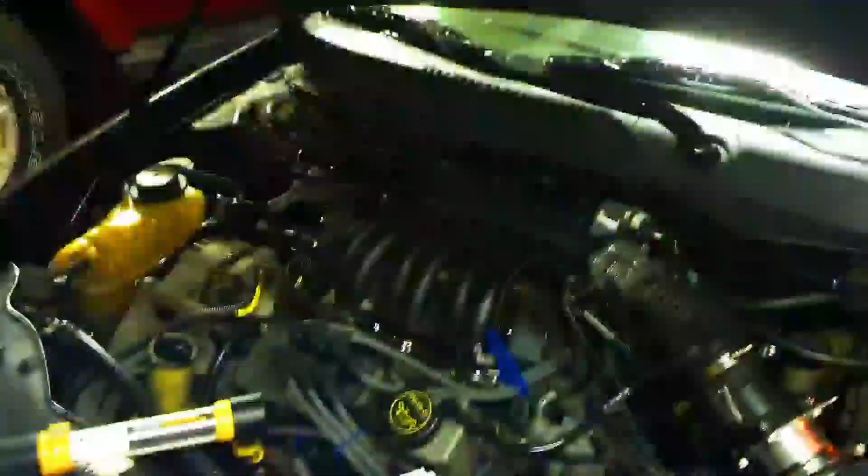Piston rings on a Ford Taurus 2003 overhead valve 3.0 liter. I'm going to start by taking off the light stuff like the upper air intake and all the throttle body and all that junk while it's cooling down because I just got home. And then after that, I'm going to drain the coolant, drain the oil, drop the oil pan, and then I guess just work my way down from there on top.

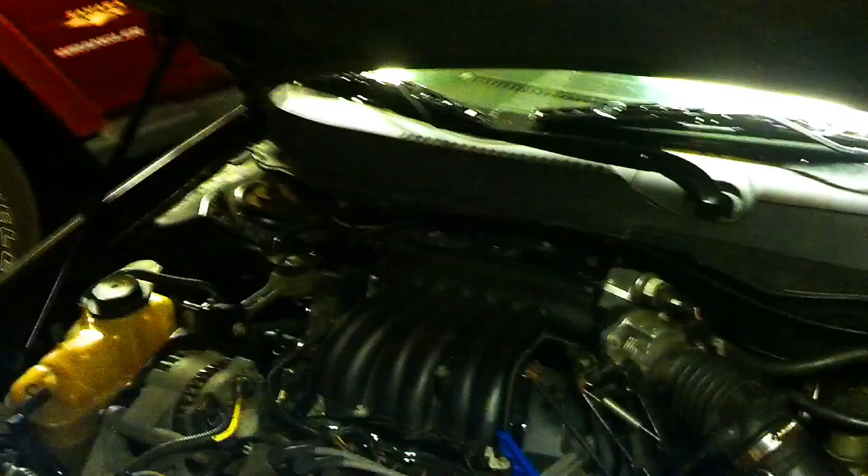Compression test gave me the results of cylinder 1 about minus 20% compression, and cylinder 3 gave me about, I believe, minus 30% compression. Cylinder pattern is 1, 2, 3, 4, 5, 6. So as you can see, I kind of prepped myself already. Got all my tools set.

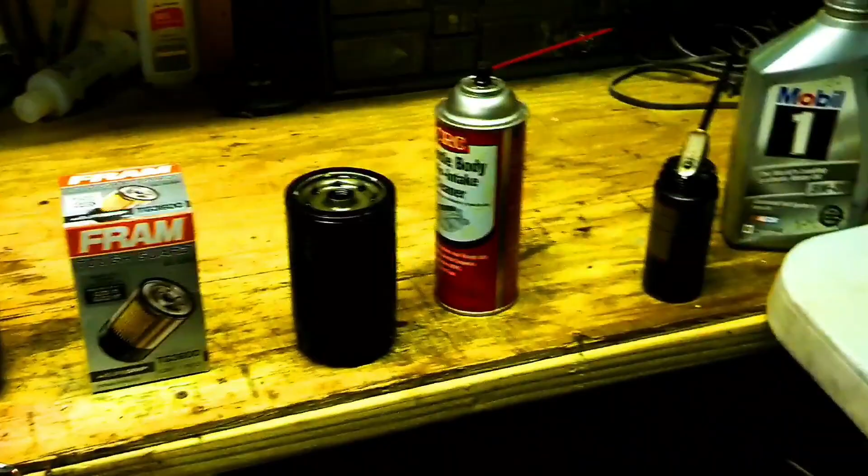I bought a honer, which you would call it, but I'm just going to be deglazing. Got my piston rings. I got valve lapping compound. Hopefully get myself to do that, if I have enough time, I pray I do. Got my oil. Throttle body cleaner. I'm going to try and record as much as I can because I only have 2 hands, you know, so I really do need this video as well. So let's get to work.

Alright, got the upper air intake off and all the throttle body stuff. I just took the motor mount, part of the motor mount off the alternator. Got that whole assembly out over there to the left of that, the intake. Now I'm working on the belt, and after that I'm going to take the fuel rails off. This whole pack of wires. Squeaking.

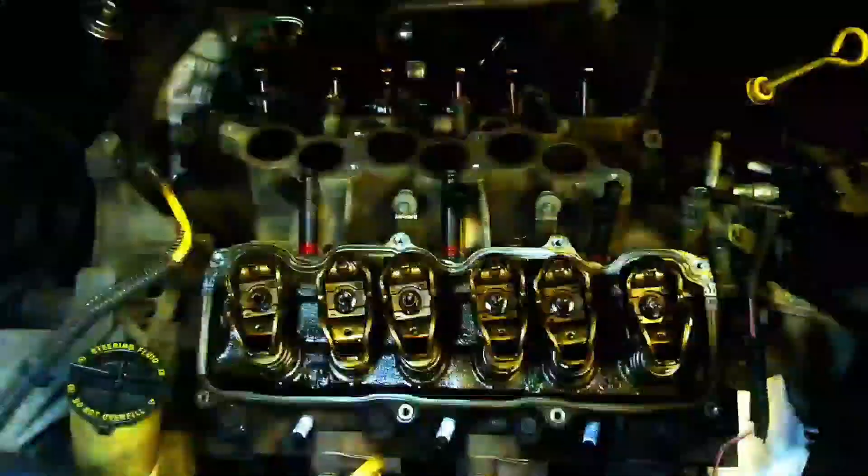Alright, we got to the rocker arms now. Just got done taking the valve covers off. Sorry, I kind of skipped around. I figured out, because it totally slipped my mind, that I forgot to pick up one of these Torx sets to get those off. And I got to get this tensioner off to get this whole mount off of the head. And I can't really do much until I get the Torx set.

So I stopped filming because I thought I wasn't going to do anything else. Tomorrow I'm going to pick up a Torx set, get this manifold off, get the heads off. Hopefully go smooth from there, and then just replace the rings and put it all back together.

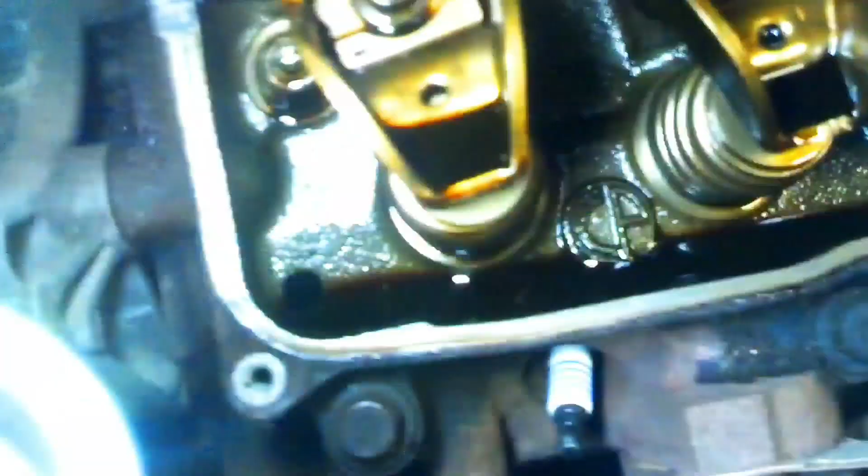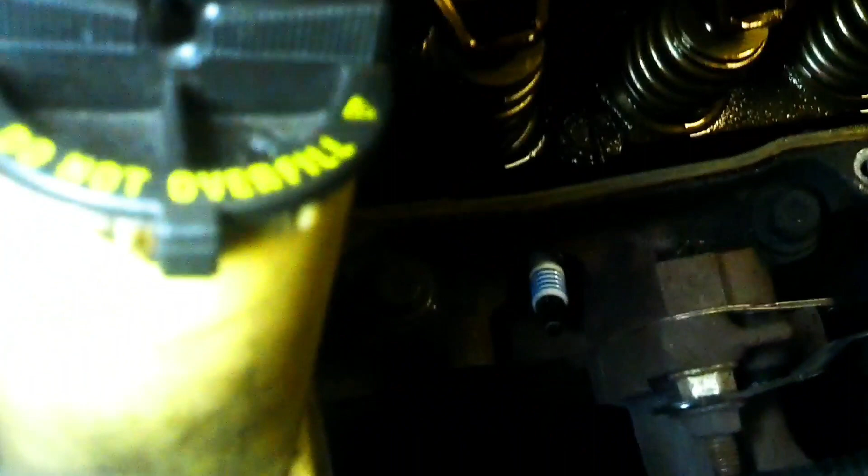I was checking the oil real good, just looks dirty. I haven't changed it in a while. Looks normal though, no debris or anything. Very clean, other than the brownness of it. Rocker arms look good. Valve springs look good. Continue on tomorrow.

Alright, had a major setback. I couldn't get the tensioner bolt off the tensioner pulley. As of right now, I drained the coolant, I drained the oil, I got the coolant reservoir out, and I'm working on the steering pump right now. I'm trying to get that off the head. And after that, I still got to drop the oil pan, and then I'm going to start taking the lower intake.

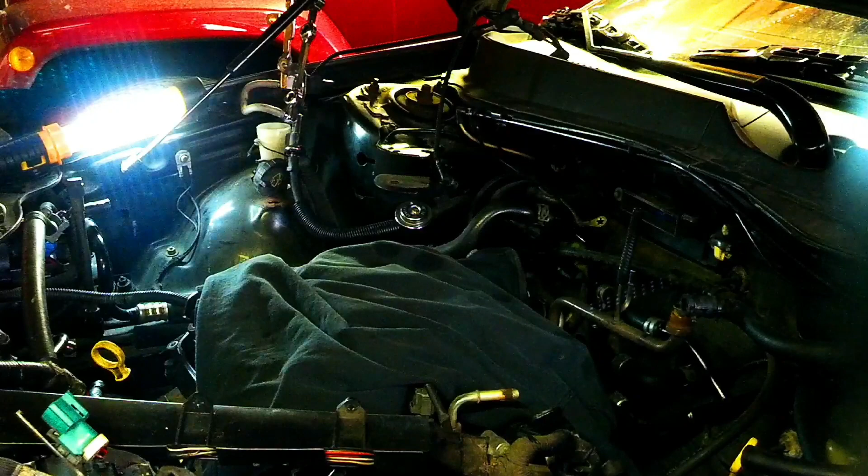Alright, from here, I'm going to see if I can drop that oil pan. Alright, finally got the whole oil pan off. Took the oil pump off, cleaned that. When I got the oil pan off though, I found these little guys in my oil pan. I haven't really found anything else other than those two little things.

I'm about to start pulling the lower intake manifold. It's basically just taking off bolts from here. I assume you guys know how to take off bolts. Make sure you keep track of all of them. Keep them in a pattern, whatever you gotta do. Line them up, label them, like so. Makes it a whole lot easier. Alright.

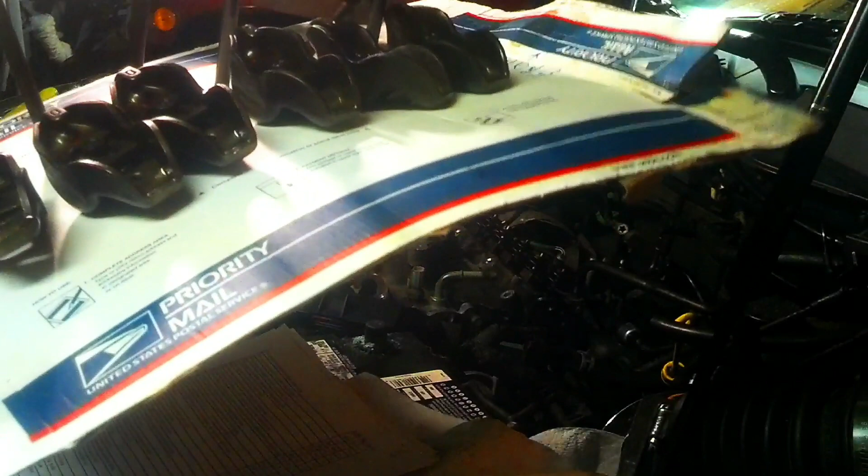Just had a push rod fall in there a little bit. If that ever happens, just use a magnet. Intake manifold. Bam.

I went onto the heads now. I took off all the gaskets. So let's get to it.

There she goes. That's what she looks like. Good 30 pounds right here. Intake valves, or valve stems, exhaust, and

there you go. I'll get the second head off in a little while. I want to work on this side first, because this side's more important. I want to see what I'm dealing with. So here we go. You see all this stuff flake off, really.

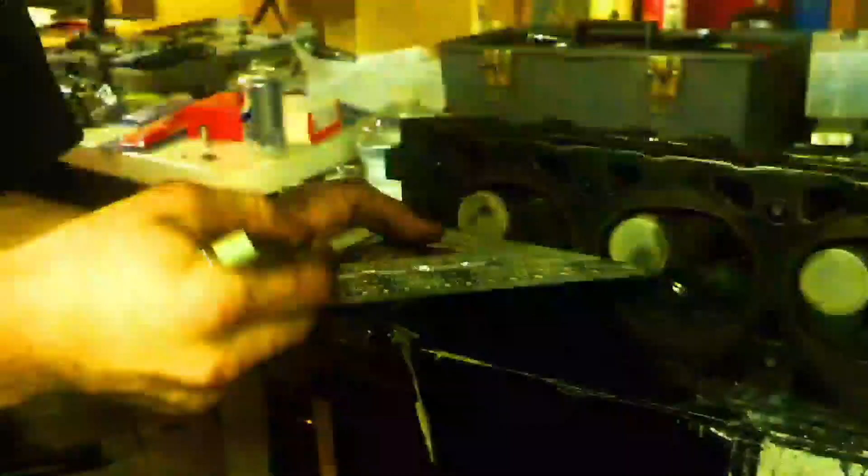Specs call for 0.08. I'm using 0.02 right now. And you're going to measure, first, you're going to start off basically 1, 2, 3, 1, 2, if I had a larger thing obviously, and then 1, 2, 3, 4. After all that checks out, basically just clean it up, put it back on.

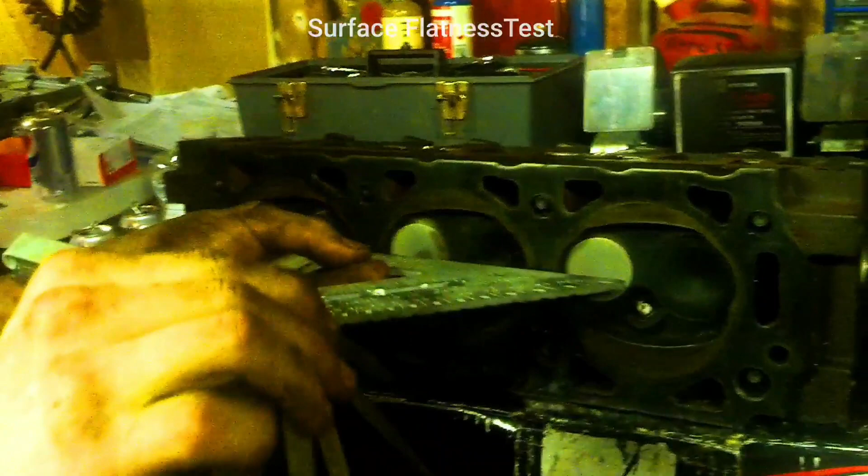Obviously I can't even fit the 0.02 in there, so so far it's pretty straight. And if it does go through, just go on to the next larger size, which is 0.03, and see if that goes all the way through. And if it does go over 0.08, you have to get the surface resurfaced. Just take it to a machine shop and have it milled. All checks out pretty good.

Alright, just got done cleaning up the head surface area. Tried to polish that up as best as I can. There's still a little bit of residue on there, but with the machine marks, they go left to right this way. So I tried to go with them as best as I could.

And I haven't done this one yet, so you can see the difference there. Nice and black still. And nice and shiny. I did one head surface already. This front one I did. Like I said, there's still a little residue left, but there's the one I haven't done yet. Sanding it takes a long time, not gonna lie.

After I get these two other surfaces done, I'm gonna devote the next hour after that to piston rings and cleaning the pistons. And I'll show you how to clock your pistons, I'll show you ring gaps and all that. So let's get to it.

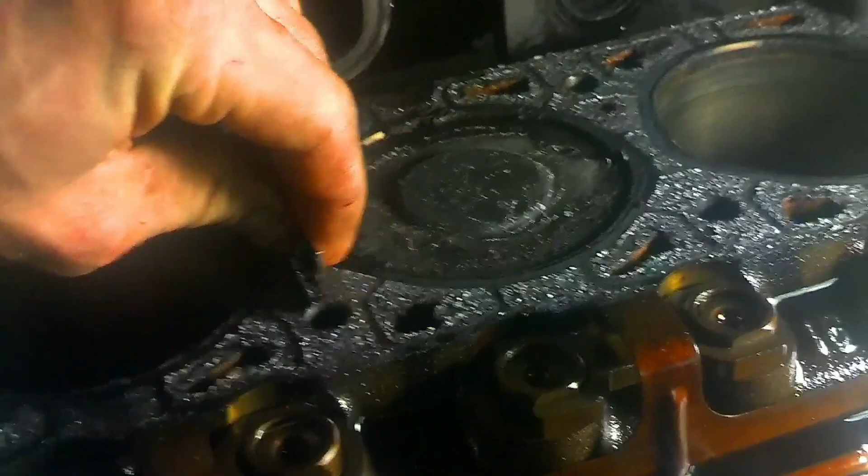I got piston number 1 out. But first, I want to clean this head gasket surface area. You're gonna take a razor blade and just very lightly scrape all this off slowly. If you do it at an angle, you're gonna hit the surface of it, scratch it, and it's not gonna be pretty, it's not gonna be good. So you just want to do this nice and gently, slowly.

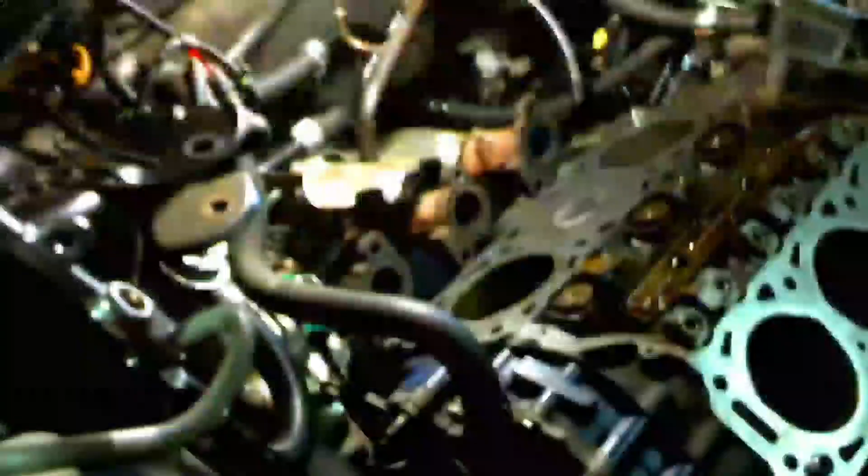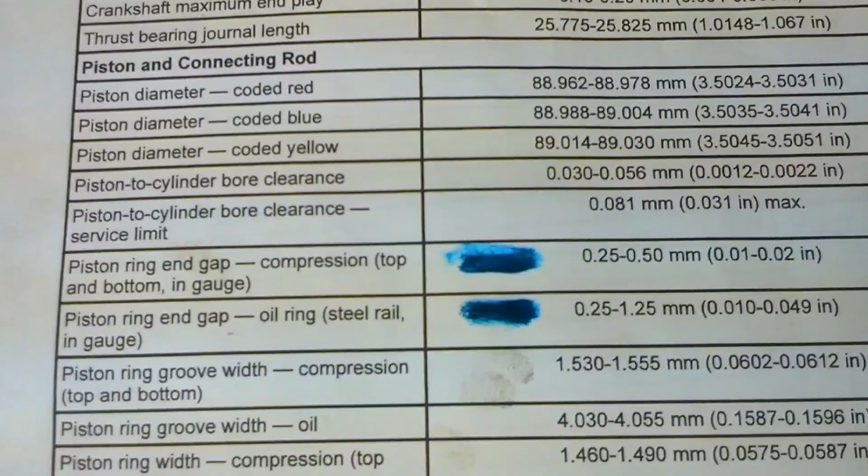We're gonna check piston ring end gap now. I took the top old one off, I just spiraled it off. They say you're not supposed to, but I heard bad things about the tool, so I'd rather just spiral them off. Specifications call for the top ring end gap 0.25 to 0.50 millimeters. Piston ring end gap for the oil ring, 0.25 to 1.25 millimeters.

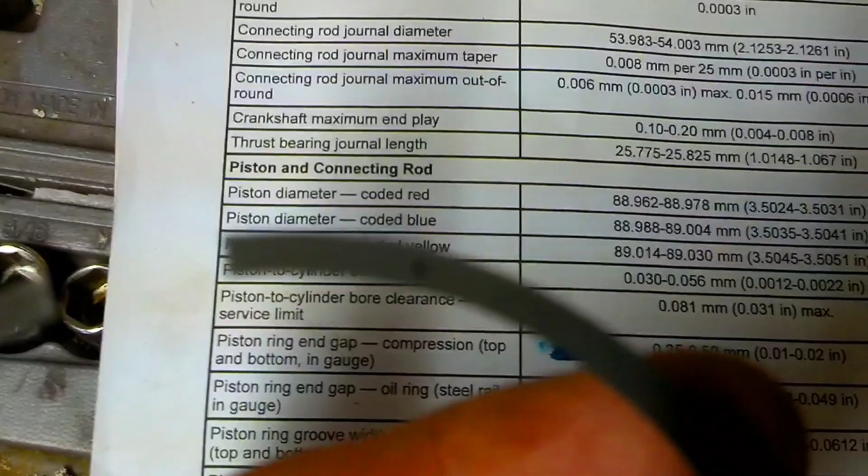Top ring is black. You have an indicator dot, and you can see that a little bit, right in the middle of the screen. That dot always faces up. The rest of the rings don't have it. They do not have a lip or anything. The top ring does. The lip faces down. And then you got your oil rings, which we'll check in a minute.

I got the old ring off right now. This is one of the bad cylinders, so I'm going to see how bad this ring gap actually is. So you're going to put it in here, pre-lube it first. I put some oil on the cylinder walls. Alright, it's in, but obviously it's not level and it's all messed up.

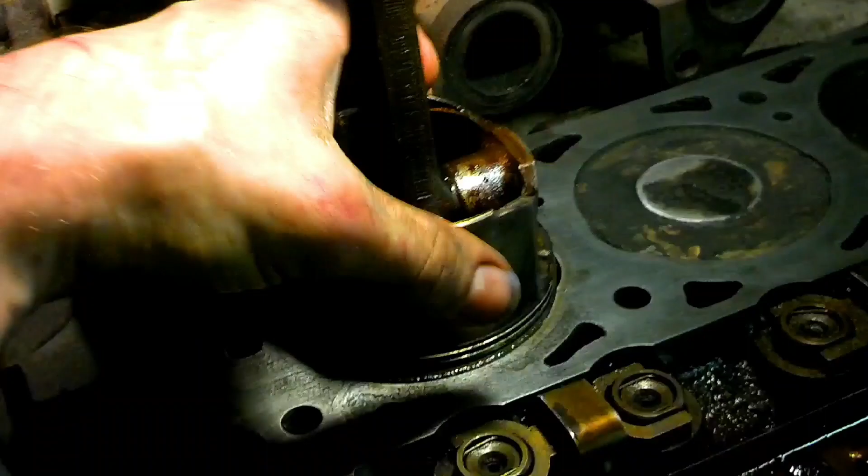So you're going to take your piston, put it in upside down. There we go. And then just let it sink down until the old rings meet up with the head. Now you're squared up. Now you just take your feeler gauge and check the gap. See, your end gap is right there. Try and do this with one hand here.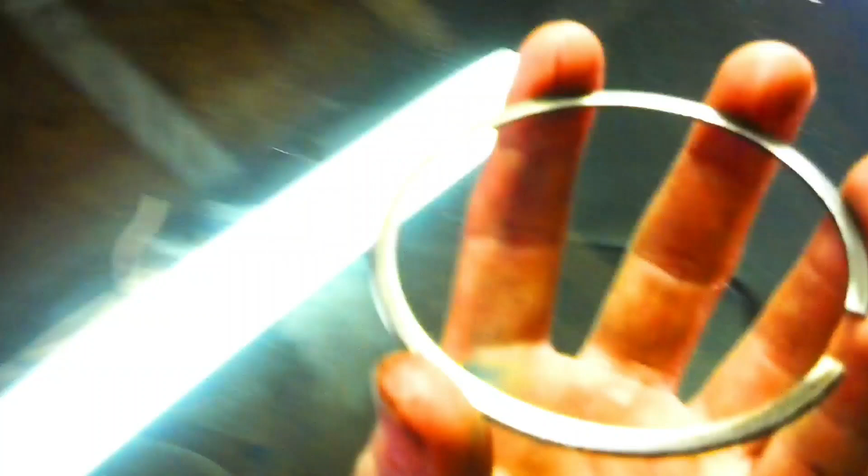I am pretty sure I just found my problem. Cylinder number 1 had low compression, so that's one of my problem cylinders. Here is piston ring number 2. Shredded on the, this is the lower side of the ring. This is the second piston ring. 0.50 fits, 0.75 does not, so I assume it's about the same size, from 0.55 to 0.60, somewhere around there.

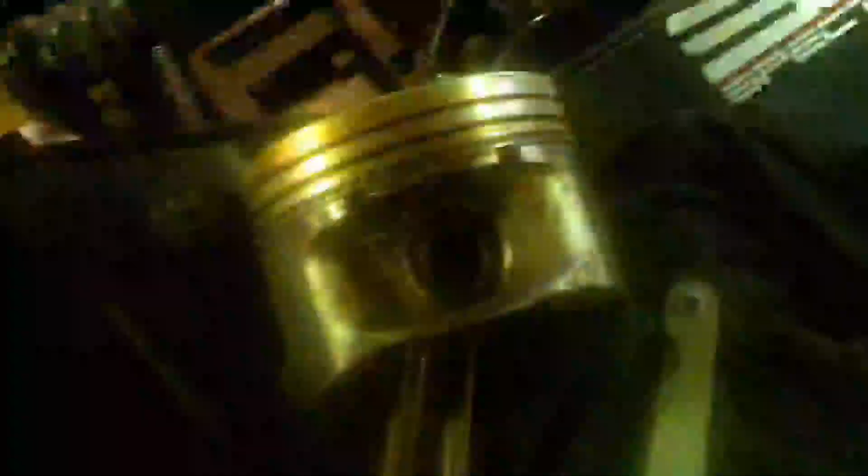Next step, before you put your new rings on, just take one of the old rings, just run it through the grooves all the way around to get all the debris out. I'd take one of the ends if you can and just run it all the way around. About to put the rings on.

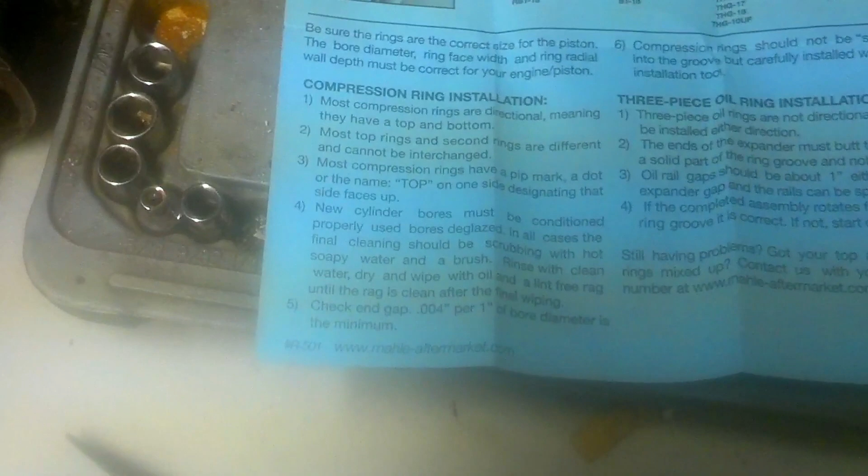Most compression rings are directional, meaning they have a top and bottom. Most top rings and second rings are different and cannot be interchanged. Most compression rings have a pip mark, a dot, or the name top on one side, designating that side faces up.

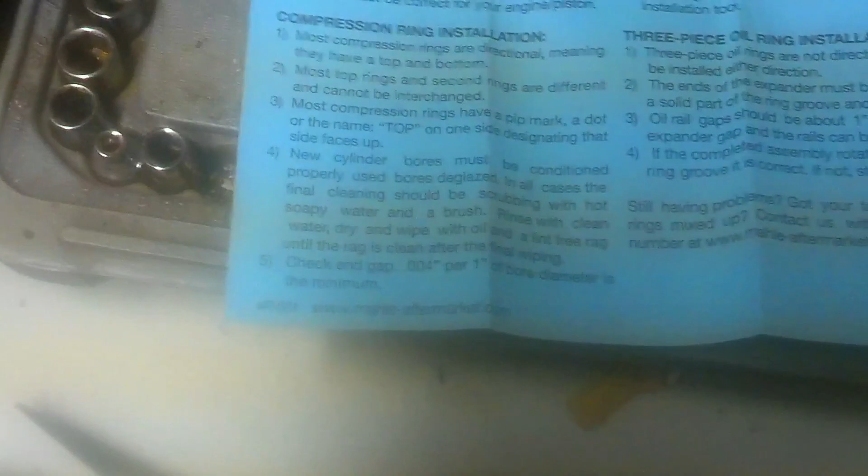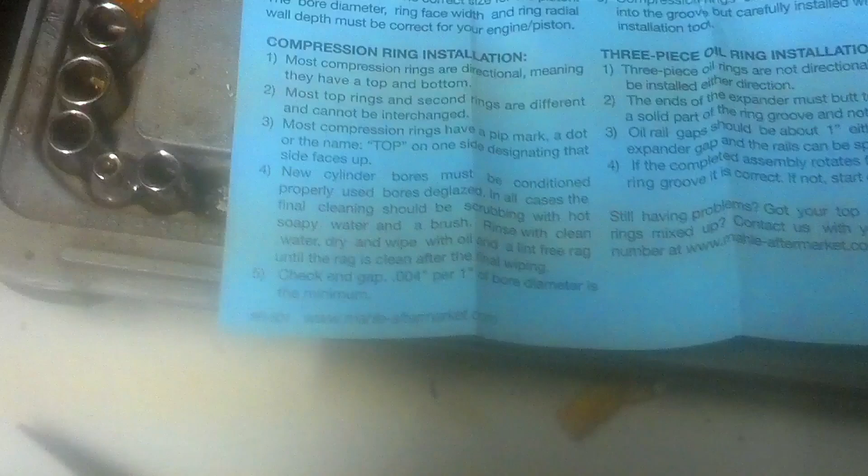New cylinder bores must be conditioned properly. Used bores deglazed. In all cases, the final cleaning should be scrubbing with hot soapy water and a brush. Rinse with clean water, dry and wipe with oil and a lint-free rag until the rag is clean after the final wiping. Check end gap. 0.004 per 1 inch of bore diameter is the minimum.

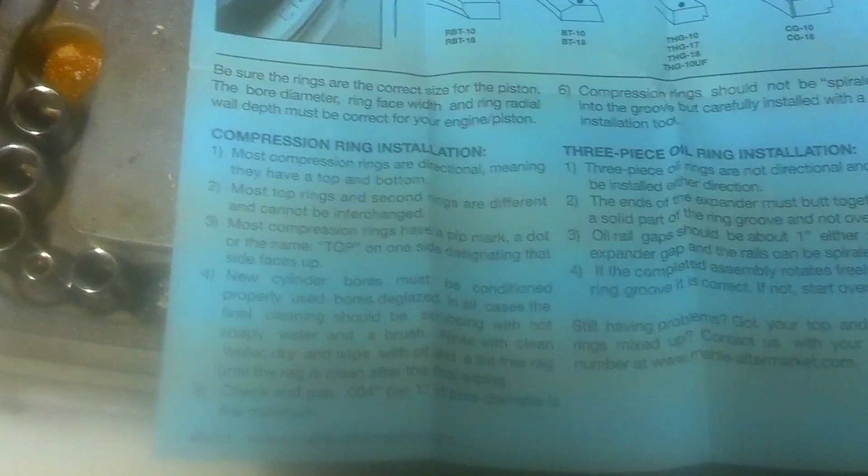3-piece oil ring installation. 3-piece oil rings are not directional and can be installed either direction. The ends of the expander must butt together in a solid part of the ring groove and not overlap. Oil rail gaps should be about 1 inch either side of expander gap, which I will show you how to clock them anyway. If the completed assembly rotates freely in the ring groove, it is correct. If not, start over.

This one, ring 1, top ring. It's got the little indicator dot right there. It's got a white mark. Compression ring 2 is right below the white marked one, right here. It does not have any markings, so they do not have to face a certain way. These do because they have a lip on the inside, I believe. Yes, they do. And then oil rings. One goes on top, one goes on bottom, and then this expander goes in the middle.

I'm about to check ring end gap first before I install them. I'm going to hone the cylinder bore next, and then throw the piston in. So here we go. Alright guys, the oil rings were somewhere between 0.50 and 0.60. Those are within specs, 0.25 to 1.25, so that's beautiful.

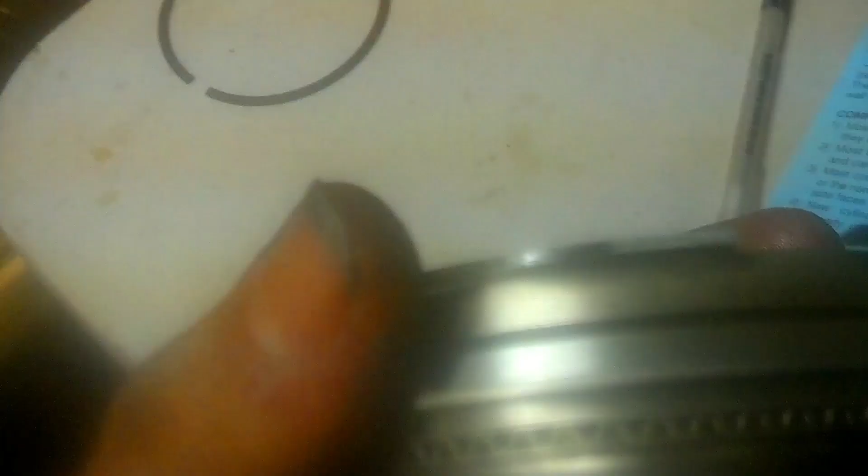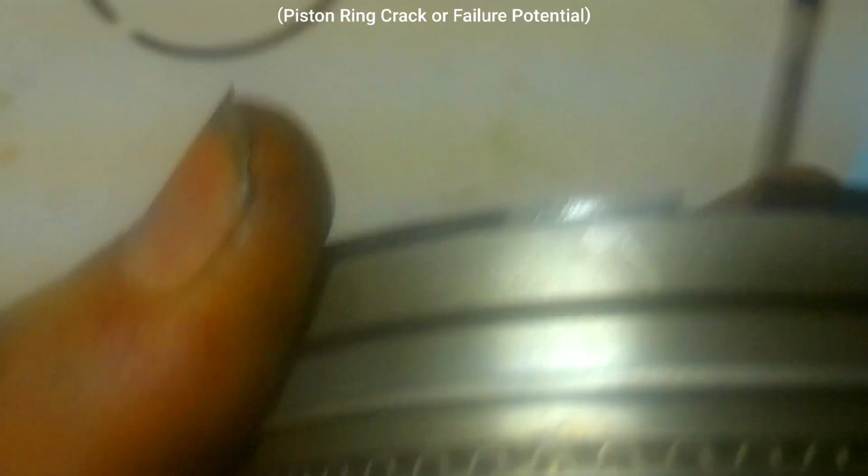The second compression ring is about, I'd say about 0.45 millimeters. Specs are 0.25 to 0.50, so that's perfect. I'd rather have it a little bigger anyway, just for expansion, because you do not want these two close together, because when they expand, they'll butt up, and then it'll just be problems from there.

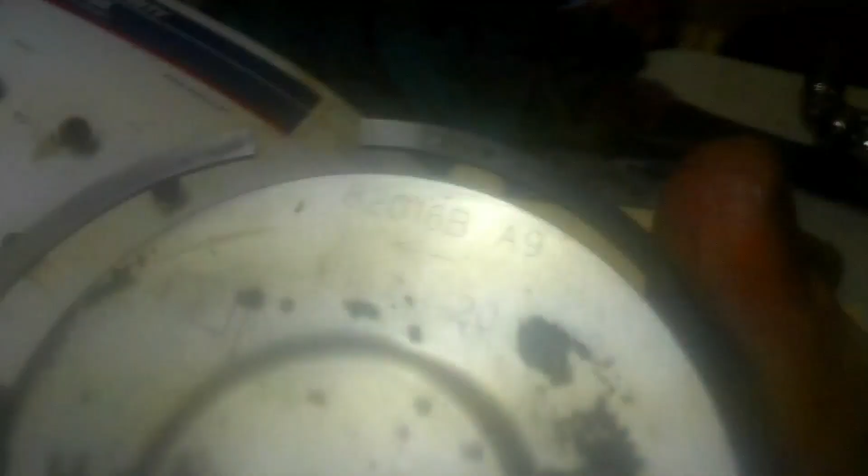So this one's done. I marked the top, little blue mark. I see it, I don't know if you can. That indicates that it faces to the front of the engine. Also, there is an arrow, there it is. That arrow points to the front of the engine, so you just throw it in that way.

About to clock my rings. This is the pattern I'm going to be using. People call it the 45-degree method. So you got compression 1 on the lower right, compression 2 ring end gap on upper left, oil end gap 1 on the lower left, oil end gap 2 on the upper right.

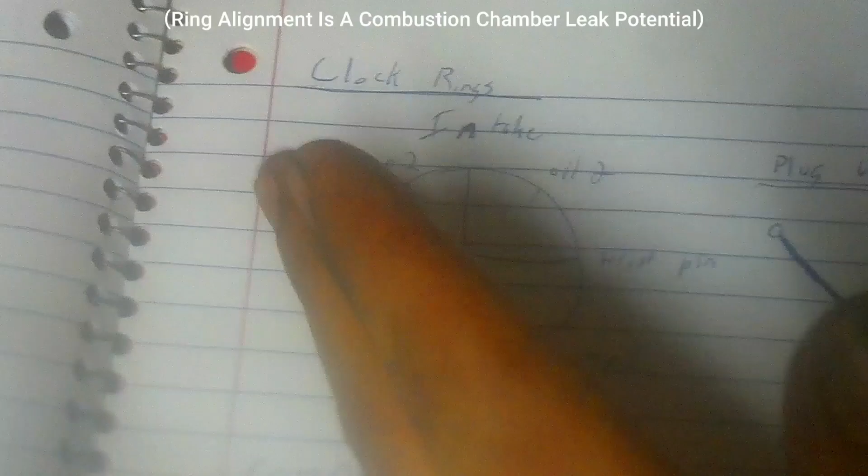So you'd never want these end gaps meeting up. That's the whole point of this. If they meet up, you'll just lose compression and it'll be a whole problem from there. This points to the direction, so intake, exhaust, and then wrist pin on the piston. And that's basically it. You just line up the end gaps where they need to be, put the ring compressor on, and tap her in.

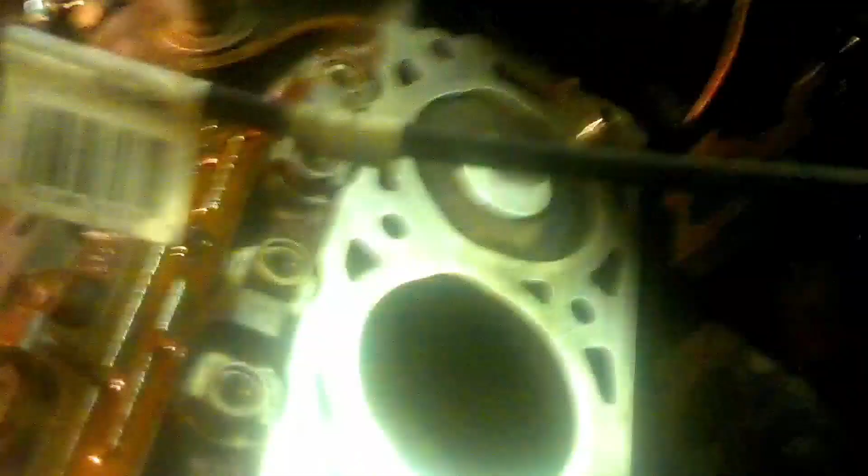Before I install my piston, I will be deglazing this. Honestly, I don't like these things that much. It's not a ball hone. It's one of the, honestly, in my opinion, I don't even like this thing.

I know a lot of people don't either, but it's got to be done. And honestly, I can still see the cross marks in the cylinder bore, so it's really not that bad. And there's no lip here. Maybe probably like a .0001 or whatever. There's barely anything there at all. So that is not bad at all. If it was, you'd have to get it rebored, but this is in good shape.

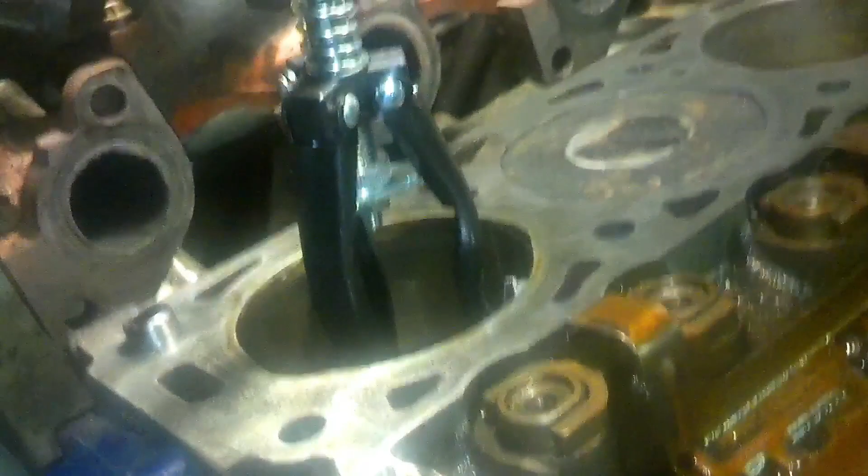To do this, you lube up the cylinder first. You stick this in. You're gonna crank it as fast as you can, and then move up and down as fast as you can. You want to get the cross marks, like an X pattern in there, so you're going to want to move up and down real fast. And only do a few passes just to deglaze it. You don't have to overdo it. Real quick, real easy job. So I'm going to give it a go here.

You do not want this thing tight at all against the cylinder walls. You want it loose. So just like that. And then keep it spinning as you take it out. Alright guys, I'm about to fill the piston in. Got the ring set. About to put the bearings back on.

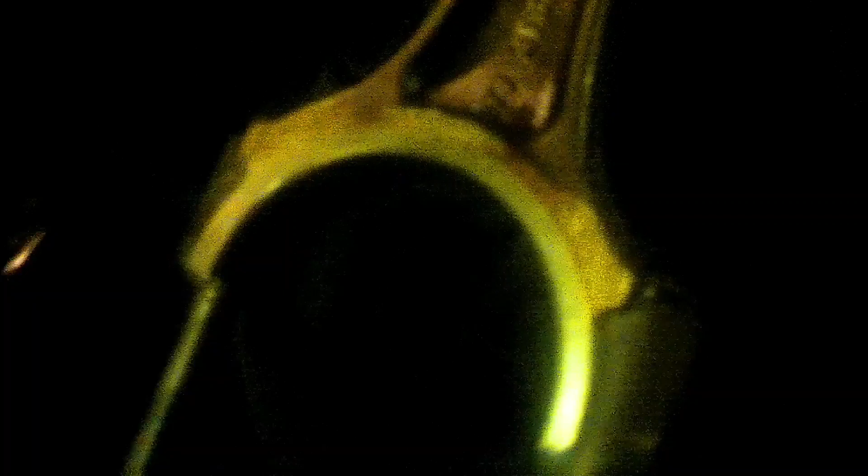See this little tab right there? This little groove? It's always groove to groove. I'm going to put this one on the top. And since I know there's a groove in here to match this groove on the bearing, that's going to match up. I know this is the front because the arrow points towards the front of the engine. So you need this facing out towards the bumper. Got the bearing all lubed.

See that little tab right there? The little groove? It's groove to groove. There's a groove on the piston bearing and there's a groove on the cap bearing. If you put it backwards, this bearing is going to spin because these little tabs lock it together. So if you don't do that, it's going to be a huge mess. Groove to groove, remember. So I'm going to throw this on. I got all the rings on.

I'll show you the crankshaft in a minute, but as you can see, I shined her up, deglazed the cylinder walls and whatnot. Basically getting ready to put the heads back on. I'm going to oil all that stuff, obviously. I'm going to oil the heck out of it before I put the heads on. And clean the surface one last time.

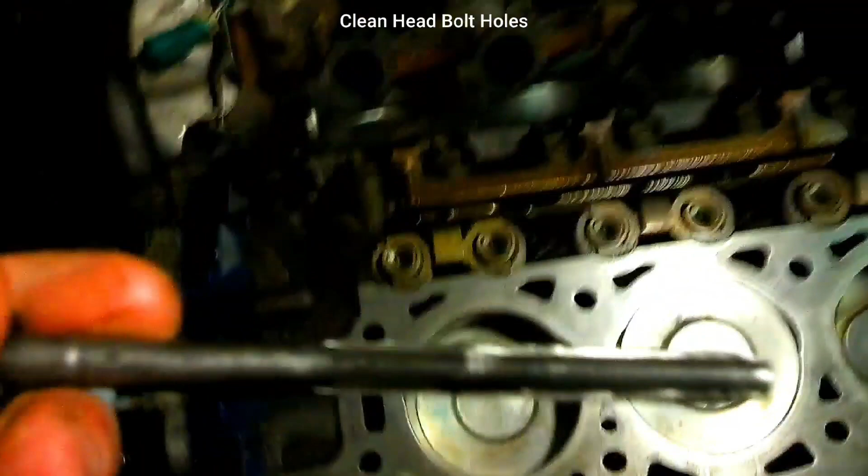Both surfaces. Also, what I was doing last night, but I didn't finish, it's called a thread chaser. Honestly, you can just use a tap and die set. Just cut some grooves in it, save you $60 so you don't have to waste your money on the tool that they sell. Just cut like 4 or 5 slits in it, all the way down.

And then what I was doing, like this, just throw it in your head bolt hole, and as you go down, you'll hear small cracks. If it gets stuck on one, go backwards. You don't want to break those threads in there. But once it stops, I was just doing that a few times. And then after you pull it back out, you'll see all the shavings and junk trapped between these threads.

This back hole down here had a lot of oil in it. I got all that out. You want these holes nice and crisp and clean. I love how these pistons look though. They look so shiny. So much better. I love it. I'm going to show you the oil pan real quick.

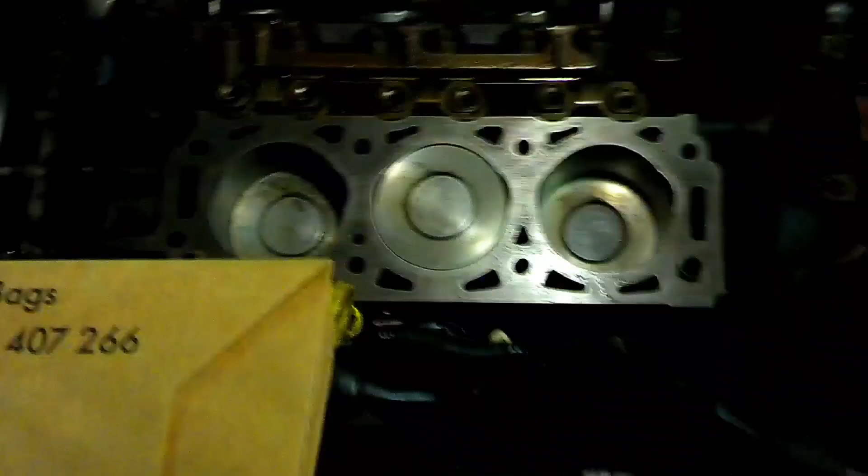Or the crank, there she is. Yep, that's what she looks like. And there's the oil pump. And transmission. One more thing, I'm gonna see if I can turn this crank over for you guys. I'll show you the pistons moving.

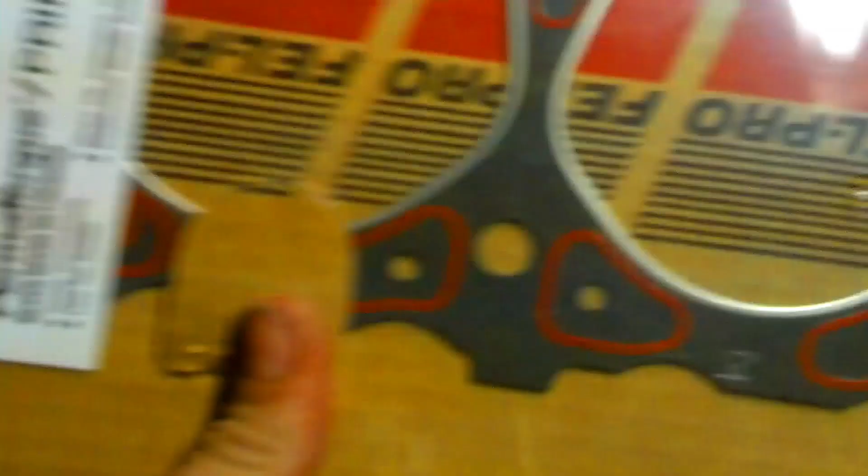It was a lot of effort to get this thing turning. Tune back in once I get these heads on. I'm gonna show you the bolt pattern and how to tighten them down. Getting ready to put the heads back on. Got the gasket here. Right there it says up. So what does that mean, guys? It faces up. And this is Fel-Pro. So I'm gonna throw this on and throw the bolts in, and then I'll show you a torque pattern.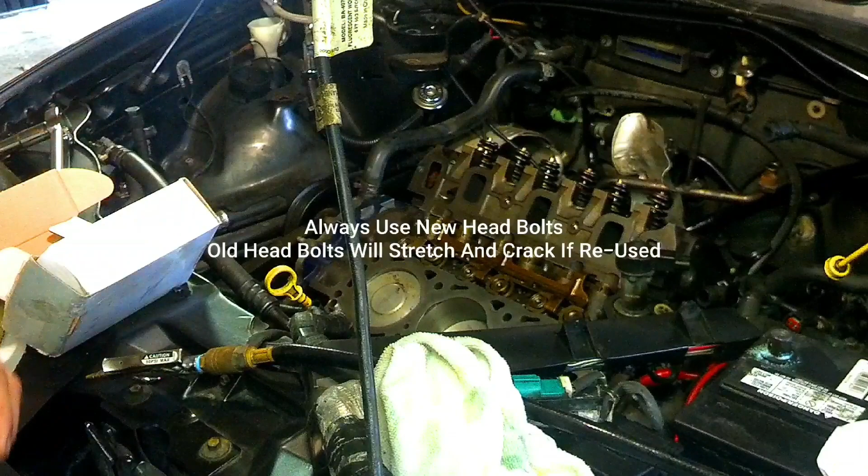There we go, got number one head on. For the bolts, I've honestly been getting mixed answers for this. I think I am going to go ahead and put a thin layer of oil on the threads. I'm not going to overdo it whatsoever. I'm going to very lightly coat it and then wipe it off with a rag. I am not going to use much at all. See, just a little shiny like that.

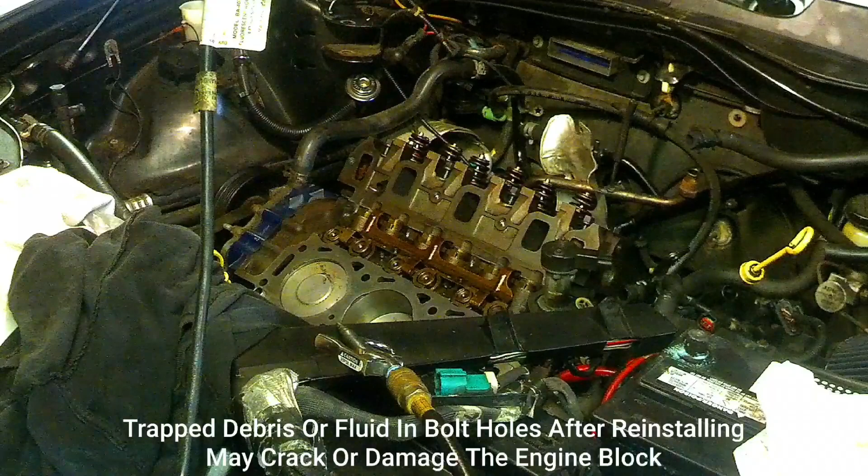I cleaned all my surfaces real well, blew out my holes, my head holes, and then used the thread chaser. Now I guess we're good to go. You guys get the head. I'm going to put the bolts in this one and then we'll clamp down.

Alright, it's a good thing I checked the torque specs. I wrote inch pounds instead of foot pounds, and it's definitely foot pounds. So I want to double check that. That's what we got. Step 1 is tighten to 37 foot-pounds. So I'm going to start with this back head here. 1, 2, 3, 4, 5, 6, 7, 8. So I'm going to go ahead and hand tighten these first.

Step 1 is tighten to 37 foot-pounds. Step 2 is loosen the bolts 360 degrees, or 1 full turn. Step 3, tighten 22 foot-pounds. Step 4, rotate 85 to 95 degrees. Step 5, rotate an additional 85 to 95 degrees. So we'll start with step 1. Good on that one. Alright, step 2. Loosen all the bolts 360 degrees.

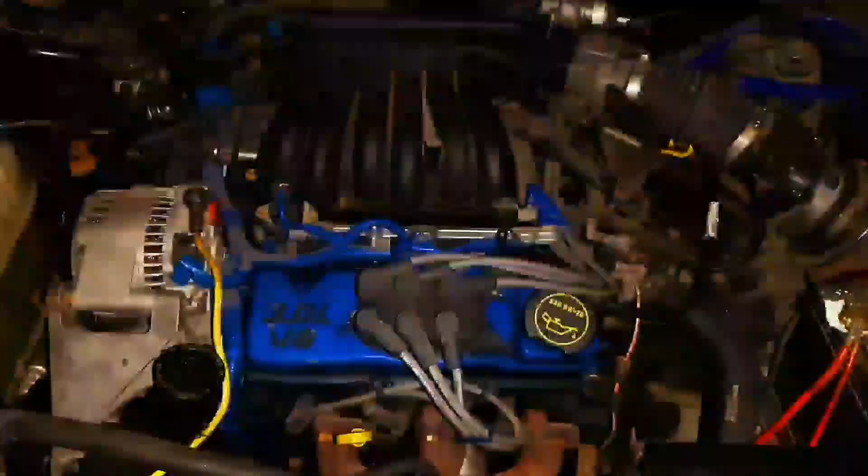Well guys, would you believe that this clip is currently 12 years later? Yeah, I kid you not. And unfortunately, I did actually end up losing a lot of footage, including the last portion where I torqued down the head bolts. And I am actually pretty upset about that. And I actually lost the clip of torquing down the lower manifold as well. But I am actually happy that I did end up somehow saving all of the footage that I do have throughout the 12 years that it's been sitting on my hard drive.

So that being said, I hope you guys did enjoy the video. This thing runs beautifully. Obviously it has been 12 years and I have been driving absolute insanity out of this thing. So that being said, this is what she looks like now. So I'll do a recap of what was missed on the last bit of the footage. Obviously, where I ended up, I was torquing down the head bolts. There was a torque pattern and sequence that you have to do.

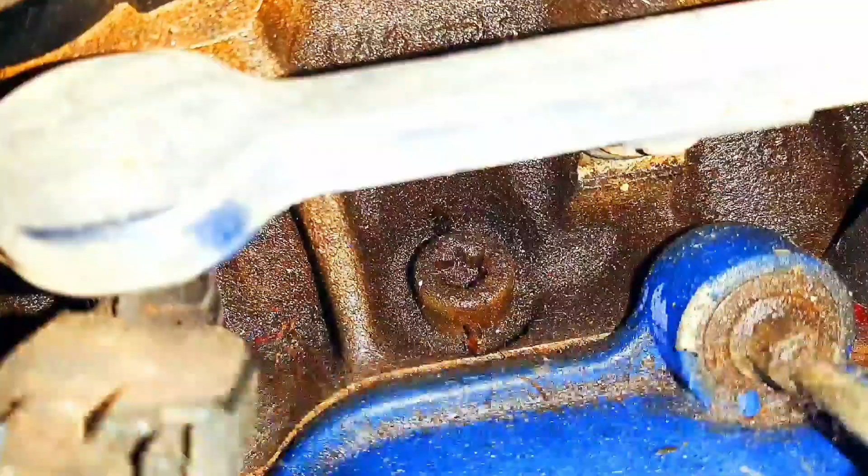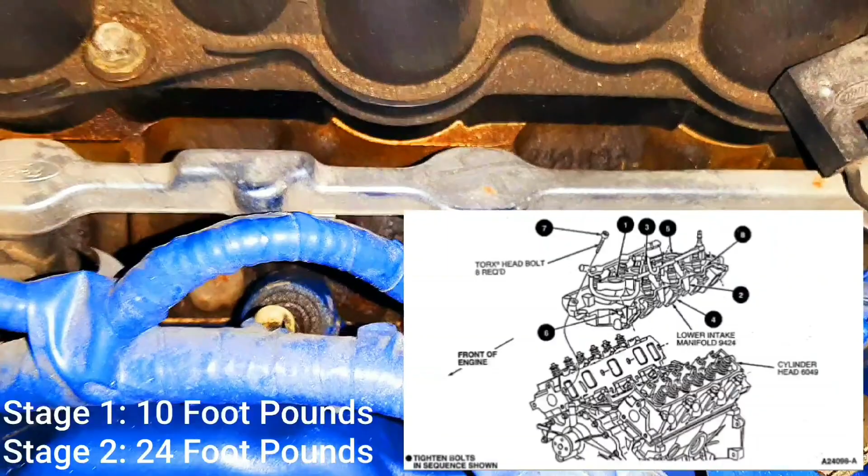After you torque the heads back on, you torque your lower intake manifold back on. Those little Torx screws there. There is a torque sequence and pattern for that as well. And also when you place the gaskets back on, you do have to use some silicone, some RTV on both sides to ensure proper gasket adhesion so no leaks will occur. And then from there on, you're basically home free.

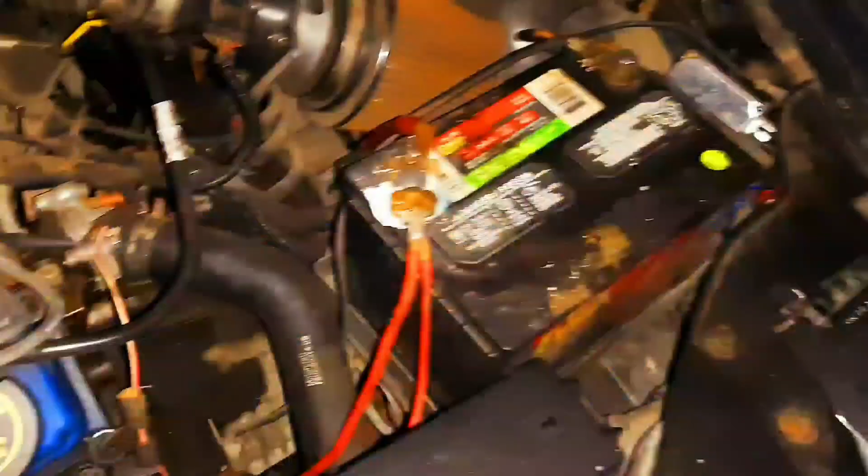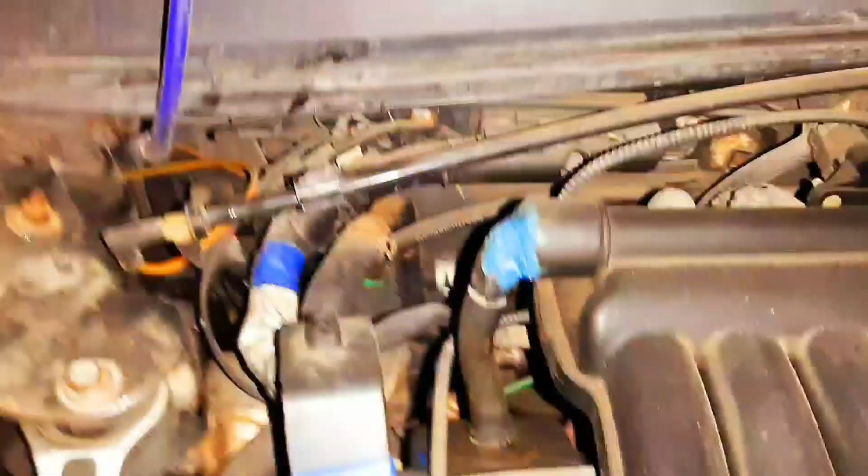Kind of just use RTV for this. This little rubber boot here for the intake likes to dry rot right here, so I kind of just RTV'd the absolute heck out of it, and I haven't had problems since. Usually when this starts cracking, it'll start sputtering, and that's always the culprit. I go right to that every time. I'll fire her up for you just to have you guys know that it actually does run, so here we go.

There she is, 12 years later. Still running strong.